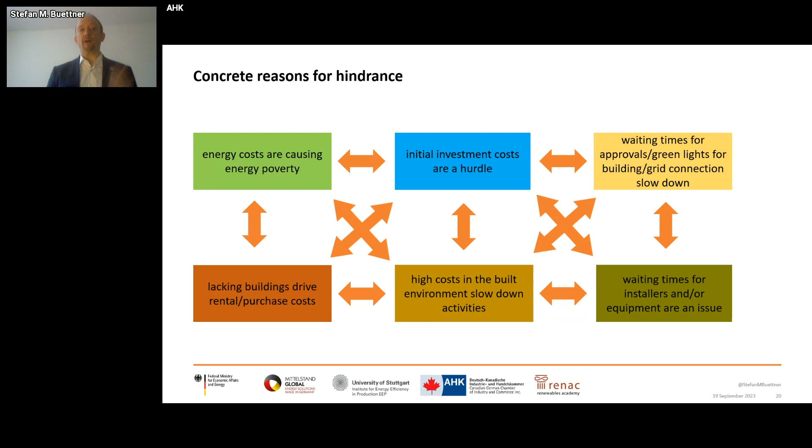However, next, the real potential of systemic efficiency is just waiting for us. And energy efficiency and systemic efficiency, it's not difficult. It's just a wee bit complicated, to use slang. Next. Increasing these resiliency approaches with systemic efficiency requires explaining a little bit what systemic efficiency is. Next.

In essence, we can optimize individual parts of the system, such as the windows, the walls, the insulation, ventilation system, etc., with the most efficient equipment. However, it may not be effective. The effectiveness, the systemic effectiveness, is combining the overall system. So for instance, I would like a certain brightness level in a particular room, and what forms of energy do I have available to get there? What are the individual steps from, i.e. solar power, wind power, whatever I have within reach, to fulfilling the desire of certain brightness?

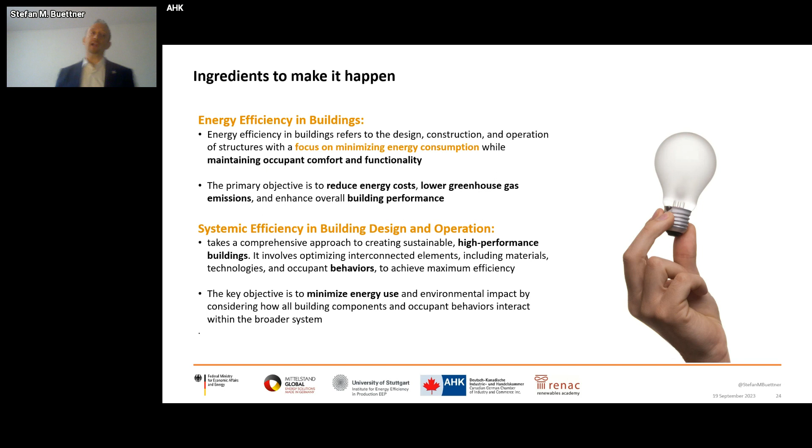Same with temperature. So when you see, we have the wiring, we have the lamps, we have the bulbs. There are many little steps. And the overall combination of ingredients, taking into consideration what I have on site and what I want, helps us in gaining systemic efficiency. Next, please.

In order to get there, we need some information. What you see here is the equipment of German dwellings with different energy sources. So about half of the households use gas as primary source of heating, and there's about a third each that use electricity and wood pellets, and the other renewable forms of heating are just catching up.

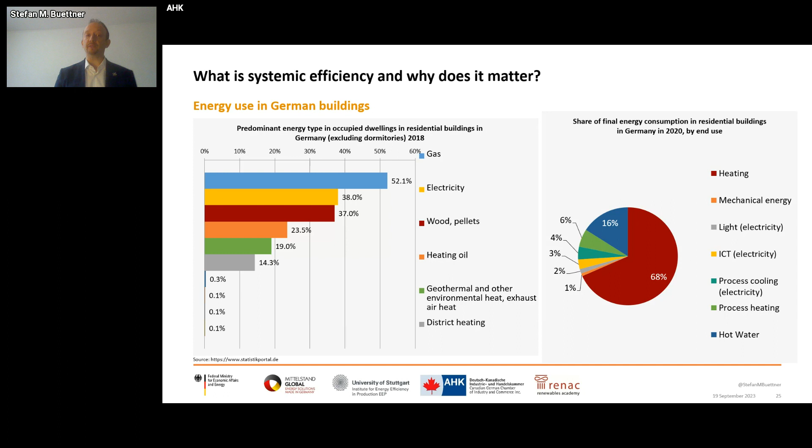What we see on the right-hand side, and that is, I believe, something very important, is that heating makes up 2/3 of the energy consumption in residential buildings. So take note, commercial buildings are slightly different here. The share and proportion of ICT, information and communication technologies, is increasing, whereas other aspects, because of energy efficiency, for light, might be decreasing. Next slide, please.

What we see here is what this translates into. We have heard from Peter about the various different realities that we already face with the buildings in our economies, both in Canada as well as in Germany. And therefore, you see on the left-hand side the distribution of all the dwellings in Germany per energy efficiency category. So the A category is the best and H is the worst. So we see that a large bulk of buildings is still in the medium to bad category, and there's only a small proportion that is already in the A category.

And since the buildings that exist would not unnecessarily be torn down, we need to find ways to improve the existing, perhaps even more than making sure that the newest ones are top-notch. On average, we need to increase the average. There's, however, lots to be done in the D to H categories. We go into that a little bit later, and of course, we should ensure that everything that is put up new needs to be done properly. Next one, please.

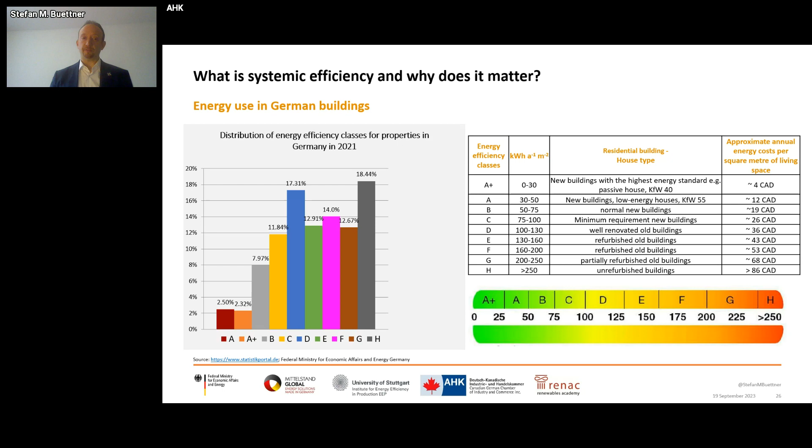For a couple of years already, there's the obligation across all the European Union to have energy performance certificates. They look a little bit different country per country, but typically disclose, and that is also a legal requirement whenever one wants to rent out a place or sell a place. This certificate has to be on display. Also on publicly open buildings, this has to be displayed, otherwise there will be fines.

However, over the past couple of years, the tendency was to go straight and very deep into the energy performance, and that was the only factor the rating went against. Now, in consideration of climate change and all that, that is now changing. Next, please.

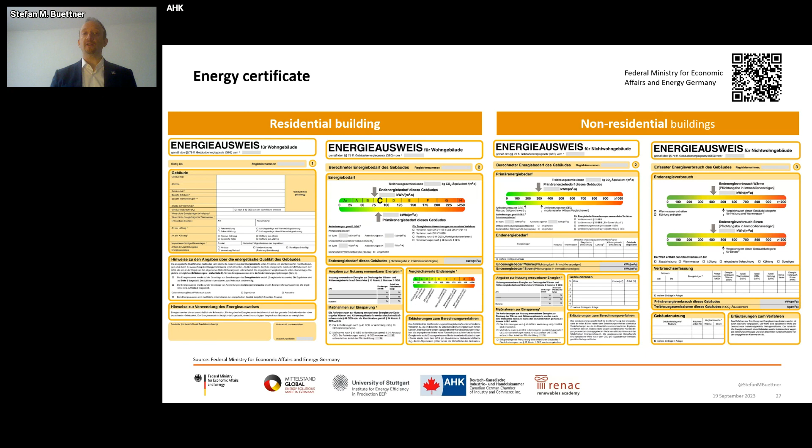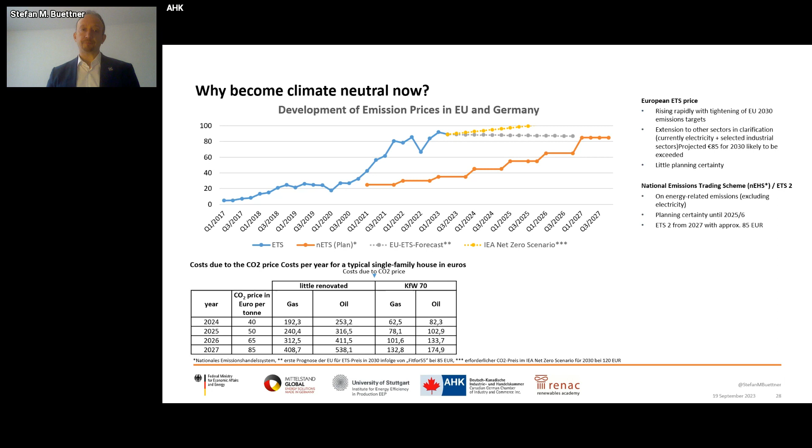The European Union, as well as the German government, is driving much more towards the sustainability footprint of materials used, not only in the built environment, but first and foremost, since this is our topic now, in the built environment here. That is associated with the Sustainable Product Initiative. And there's the attempt to build the national funding programs more on the overall environmental footprint, so the emission efficiency rather than just the energy efficiency. And that should lead to a so-called building resource passport. There's a QR code where you can find more of an attempt on how this could look like.

This topic is crucially important because of the crisis that we are confronted with. Where do I get materials from, particularly the critical materials that I need? How can I make better use of the materials that are in the system? How can I increase the recyclability? How do I know where the materials are from? That is also very much linked with the supply chain directive, where I need to be able as a manufacturer to disclose that the materials were harvested under acceptable conditions. So there are many things factoring in here, and more products will be confronted with the request to disclose the embedded emissions. Next.

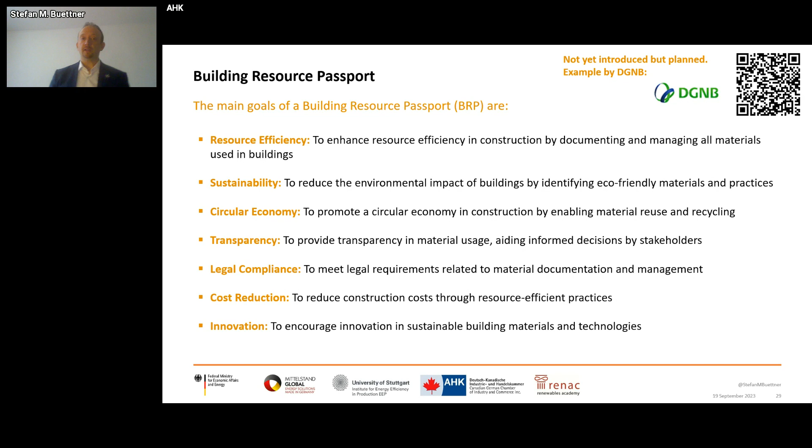In the attempt to support this, there are many activities, and this is one of them globally, to help develop the decarbonization of the built environment in general. So that's the building materials that are to be decarbonized in order to facilitate that. Because if I build a building, I use what's available on the shelves. But how do we make sure that what ends up on the shelves will gradually be better in their lifetime energy performance and emission footprint? So we need to put the impulse to act at the very beginning of the chain, so that we enable the built environment to be able to draw from the best performing products.

Next slide, please. So what could those dimensions be? There are three primary dimensions. Two of them are most important in our context today, which is what means are there to reduce the energy demand? Because when I reduce the energy demand, whatever source of fuel I use, I reduce my costs, I reduce the emissions.

So being smart about it matters, and therefore we need to be clever also in allocating the mixture of materials and technologies that we use. We can substitute to reduce the footprint, substitute the fuels, which depend largely on what I have around me, but we'll get to that later.

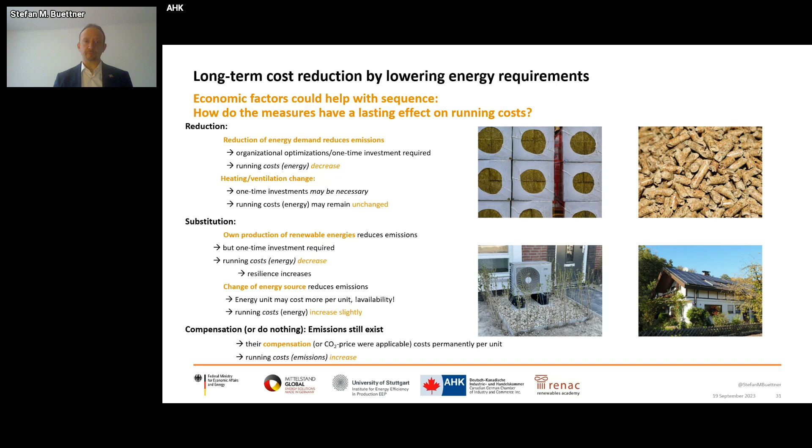And if I am, for example, in the office context and my business wants to promise and pledge for net zero, then we may also need to look into compensation schemes if there are certain things that cannot be completely substituted with, say, renewables. Next one, please. Now let's dive into ingredients on how to make this happen. Next, and next again.

Here, planability is the largest desire, because in addressing the climate crisis, both the German and the EU legislative bodies have tightened the regime quite a bit, and rightly so. However, that puts large tension on all those that need to act on that basis. How shall I afford that? How shall I lift the multiple tens of thousands of euros investment for that? And there, clear communication and planability is of the utmost importance, as we have learned the very hard way this summer.

So in essence, and that was the finding, wherever the local authorities plan to implement district heating and cooling, there's not going to be a requirement to put in something like heat pumps. Whereas wherever the local authority doesn't plan to put district heating and cooling in place, there is going to be an obligation to take heat pumps or equivalent action.

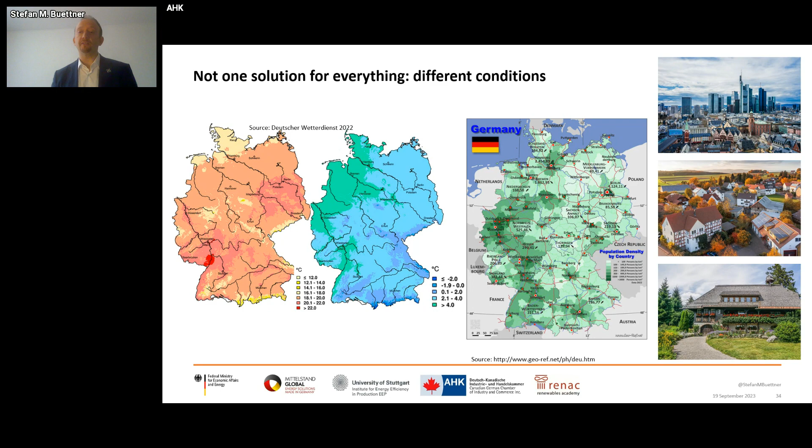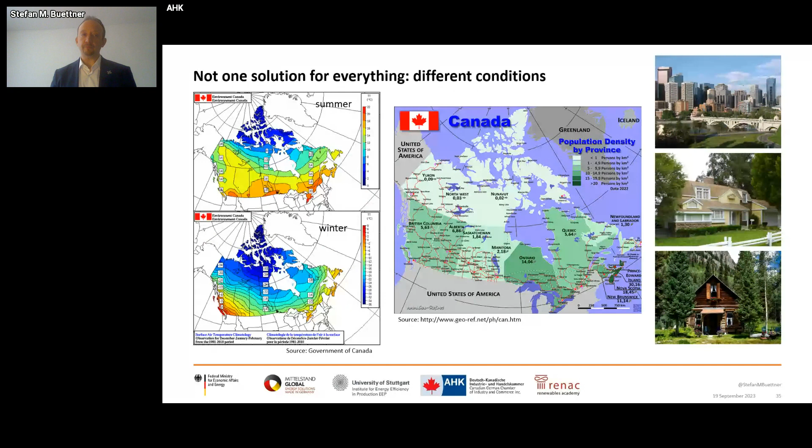If we click next, we see that, and you know that better than I do, the temperature delta is much, much more severe in Canada, and your rural is much more rural than our rural, but the principle applies the same way. Next, please. So in order to get there, we have many different technologies that can help us on this way. Next, and next again.

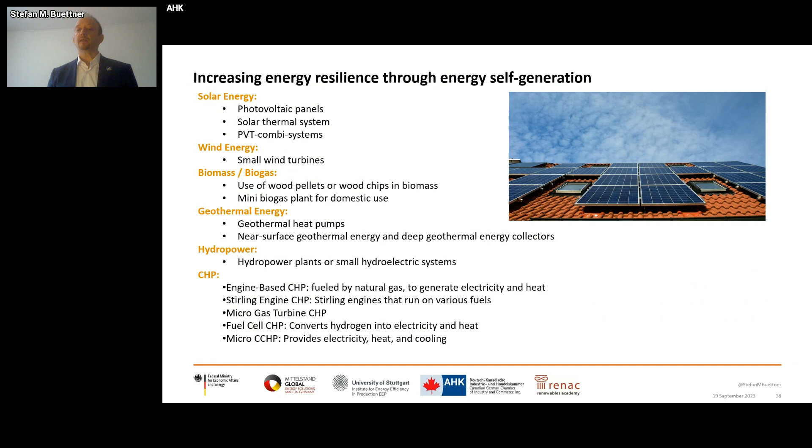Some of these are creating resilience through self-generation. So what can I do to create my own energy, particularly in the remote areas where I may not have easy access to large-scale renewable or clean energy generation? I'm not going to go into detail here. Next, please. What these renewables have in common, however, is that most of them aren't available 24/7 in the same intensity. That has been a cause for argument in the past. However, there are solutions. Next, please.

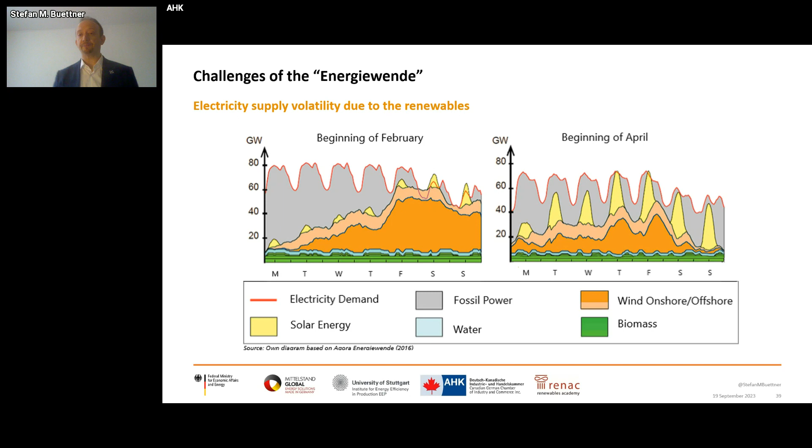The solutions against that are called energy demand side flexibility, meaning adjusting my own demand of energy to the available amounts of energy. So either take energy earlier or later than usual, or increase or decrease the energy per time. So for example, putting in the vacuum cleaner, the stove, and the kettle at the same time, or just one after another.

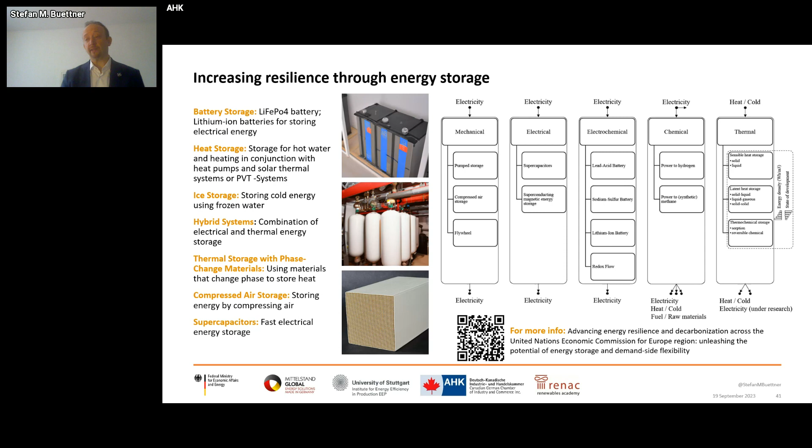Next, please. What is important to consider, though, is that with storage, particularly electric generation and battery storage, the way the energy is being transmitted is crucial. Because most types of on-site electric renewable generation generate electricity in direct current, and batteries also store energy in direct current. So ideally, we can use the power line, the generation, and the storage, and directly feed the energy from one to another, and that way we can save up to 10% of the energy.

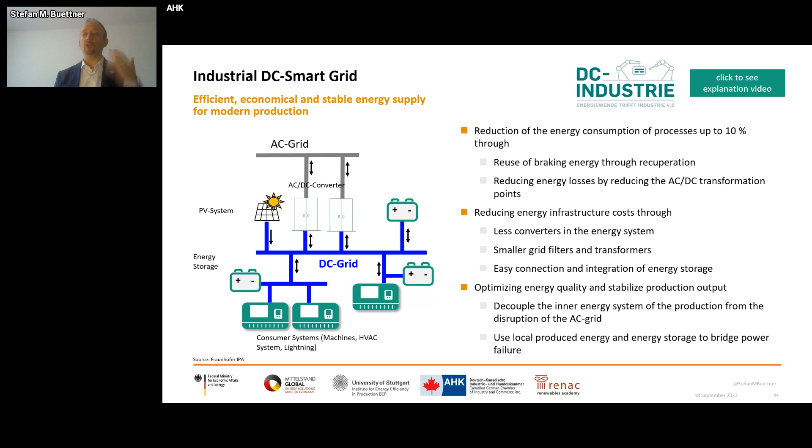Now a series of single clicks, please. We can do a lot about building materials. Next.

There's lots and lots of technologies in the heating and cooling section. However, there we need to phase out gradually the gas and the old stoves and see how we can make better use of waste heat and other technologies that serve the desire, i.e. getting warm to feel comfy, with what's most sensible in that context. It could even be an infrared heating if I have surplus renewable electricity.

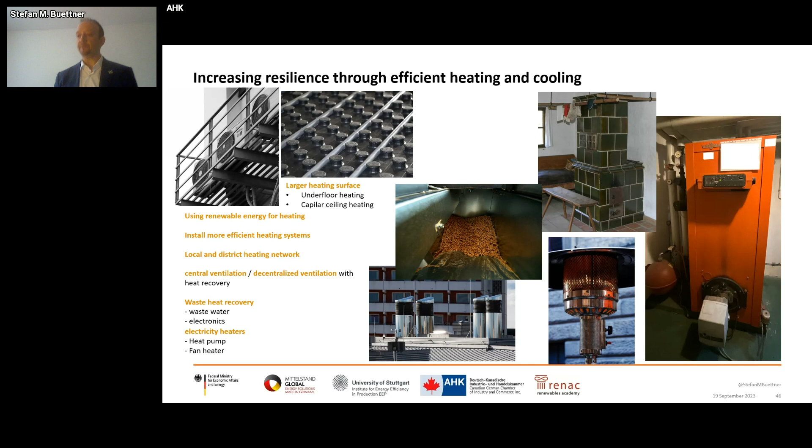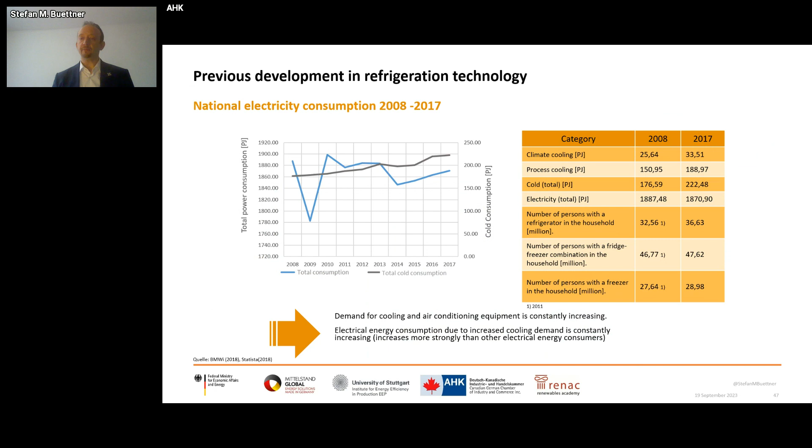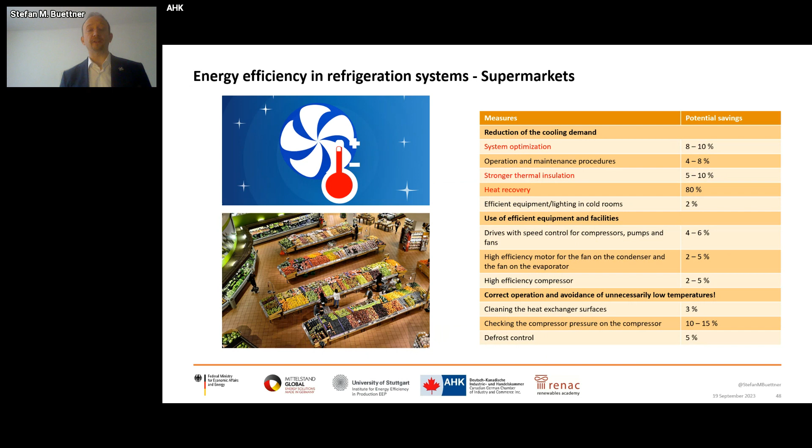Next one, please. As said, refrigeration and cooling in the extremely hot summers becomes more and more important. And that's the one form of energy that is gradually increasing in the demand. Next. Particularly in the context of offices and supermarkets, etc., where the cooling requirements are existing, there are so many techniques on how to save on energy consumption, particularly through heat recovery. And there are very nifty ways as an energy or building user to apply those. Next.

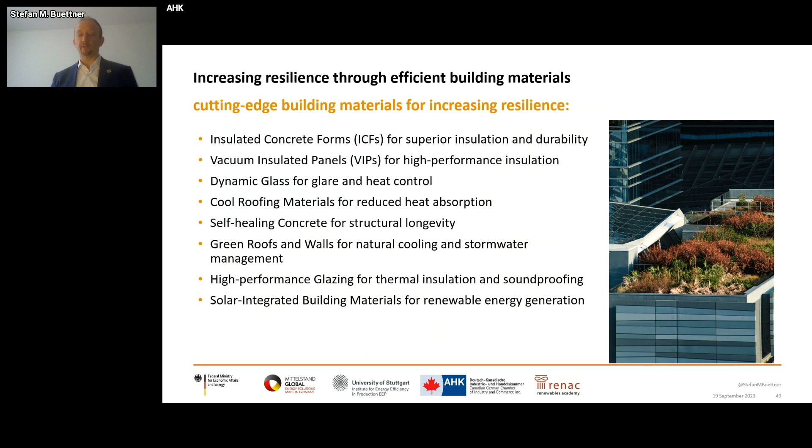Innovative building materials is something that we'll hear a bit more about later. So therefore, next again. The challenge or the opportunity we have is to systematically put things together. So avoidance, reduction, implementing renewables, making use of passive ventilation and active heat recovery. Next. Next again, please. Good.

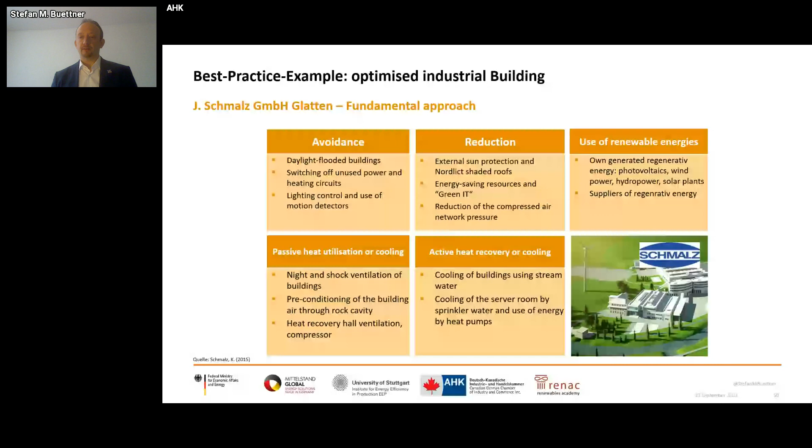Digital means can help us a lot. And on the previous slide, when you get it, you can look at that closer. You find many, many digital solutions on how to help that, and there's also a company to come. However, in order to find a solution, I need to be able to chart my path effectively, and for that, I need to know where I am. Next.

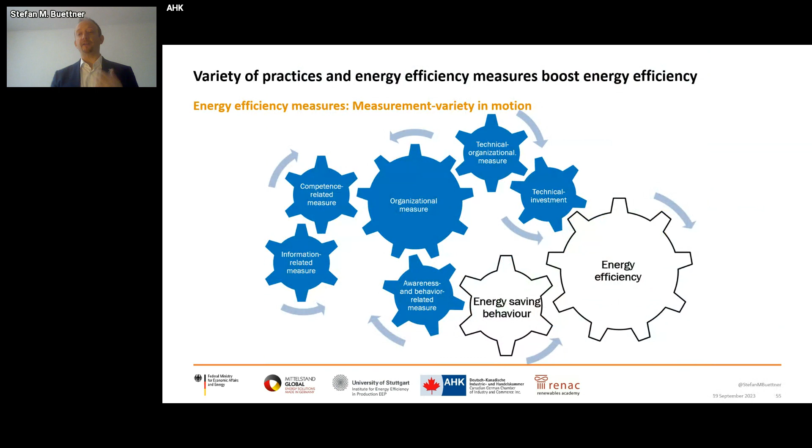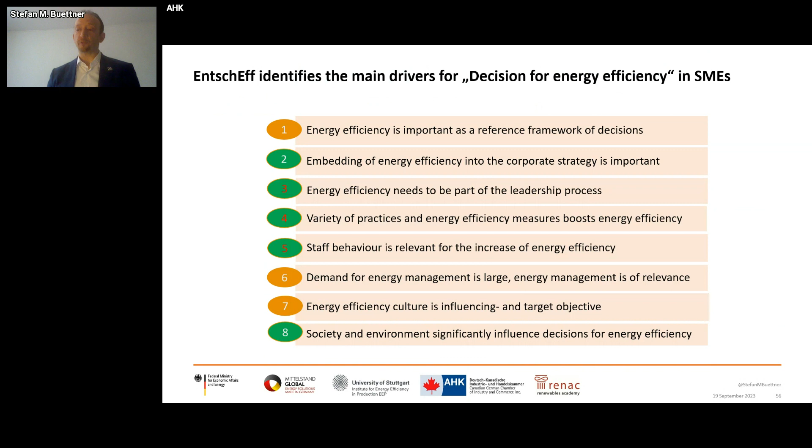The critical aspect here is to trigger, however, the decision, if you're not yourself the decision maker. And for that, next, we need to not only invest into tech, we need to have a range of measures that emphasize each other's impact. Next. And because of that, collectively help to drive energy efficiency. Now, four clicks now. You can look at the examples in your own time. Thank you. And one more. And one more.

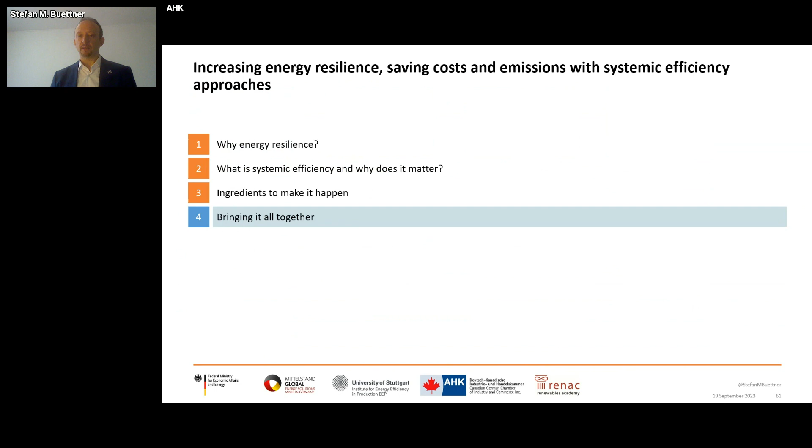So finding the ideal mix is actually the real crucial bit. Next. Because it combines not only technologies, next, but the human factor. The human factor means I need the technology, next. I also need the business model, but I particularly need the humans. Tear down the walls of the unknown unknowns. Technology versus taking the decision. The decision is the important thing. Otherwise, technologies don't help me.

Getting the buy-in of the stakeholders is so powerful and stronger than just mandating them to do something. Looking for energy waste, like unnecessary consumption. Next. And awareness is much more powerful also as perception, because if I give examples on what could be done, the human brain does something really cool, and that is allowing us to adapt the knowledge from one area to another. And the intrinsic motivation of the stakeholder works much stronger than an ordered one. And therefore, it's important to understand where are the pains, what serves most.

And removing the barriers itself, as we know also from our New Year promises to ourselves, removing the barriers doesn't make us go to the gym more often. We actually have to do it. Yeah, so we need to nudge it. So in conclusion, we need to go beyond removing the barriers. We need to provide the missing knowledge and empower people and stakeholders to solve the issues. We need to remove fears, encourage people to take a decision, and accompany them in the journey ahead.

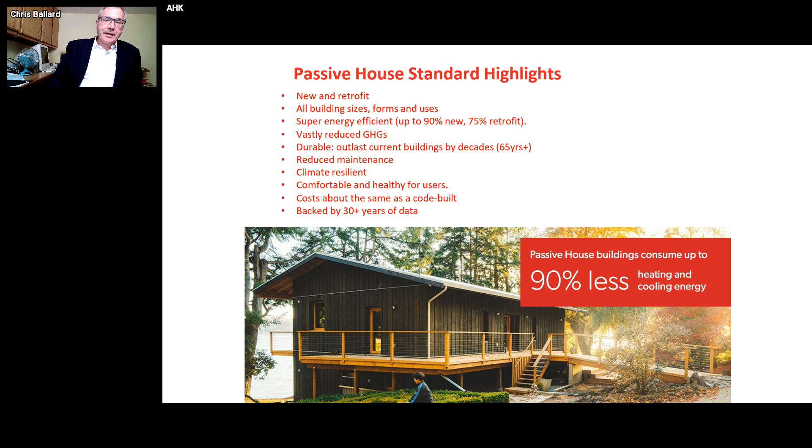And so funding from the federal government and the provincial governments looked at a number of ways of addressing this energy crisis. The one they settled on after testing a variety was really good insulation, good components, air tightness. In other words, a lot of the things that have been adopted in the Passive House methodology. A number of other countries were also looking at the same thing. So it's really kind of neat to see this Canadian project reflected in a lot of the Passive House standards. So next slide.

So you've probably no doubt heard about the wildfire situation in Canada. It's been a complete and utter disaster. We've lost 16.5 million hectares to wildfires this year so far. We still have a couple more months of wildfire season left. Normally, it's closer to 2.5 million hectares. 16.5 is a lot. More importantly, it accounts for 15.7 thousand premature deaths in Canada per year, primarily due to particulate matter that comes from wildfires. It also comes from burning diesel fuel and burning coal.

So, I mean, we can measure the deaths because of climate change, and it's only getting worse. We've had 2 heat dome events in recent years that resulted directly in 700 deaths, probably double or triple that if we really wanted to peel back the onion. And we know that climate change is a $25 billion annual hit to the Canadian economy by 2025. So all of this is to say that Canadian government and business are motivated to address climate change. Next slide.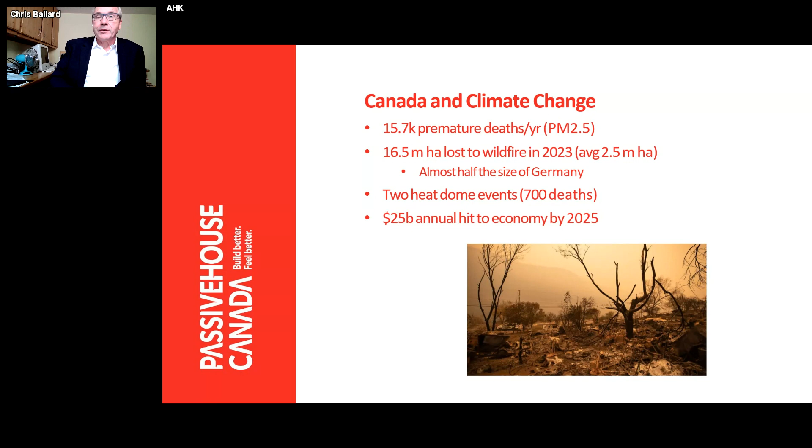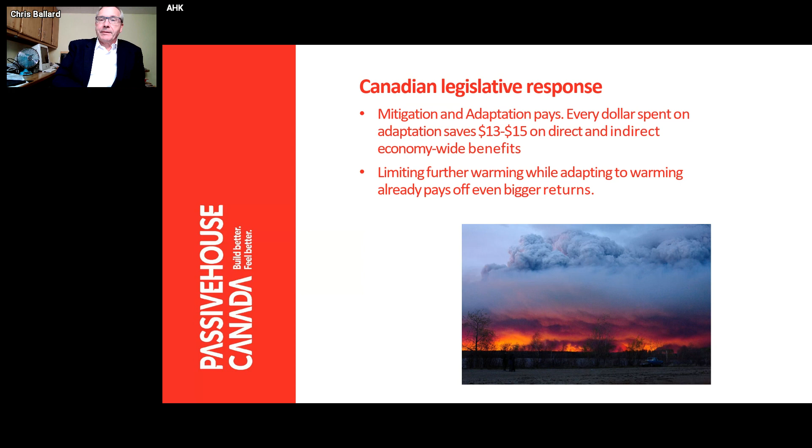So what is the response? Well, governments of all levels agree that mitigation and adaptation pays. We know in Canada that every dollar we invest in adaptation saves us $13 to $15 in direct or indirect economy-wide benefits. We know that limiting further warming gives us even bigger returns. Next slide.

A bit of a Canadian legislative response. Canada obviously is a signatory to the Paris Agreement, but within Canada, all of the provinces and territories, together with the federal government, signed an agreement called the Pan-Canadian Framework on Clean Growth and Climate Change, and that does 3 really key things. It sets emission reduction targets. It looks to grow the economy, and it looks to build resilience to a changing climate.

I will say that at the same time the provincial and federal governments were working on this, we've had 400 plus Canadian municipalities declare a climate emergency, and they are all looking for ways of reducing their carbon footprint within their communities. Namely, primarily because in Canada, a lot of our GHG emissions come from buildings. A lot of these municipalities are looking at how they can improve their own building standards to help reduce GHG emissions. Next slide.

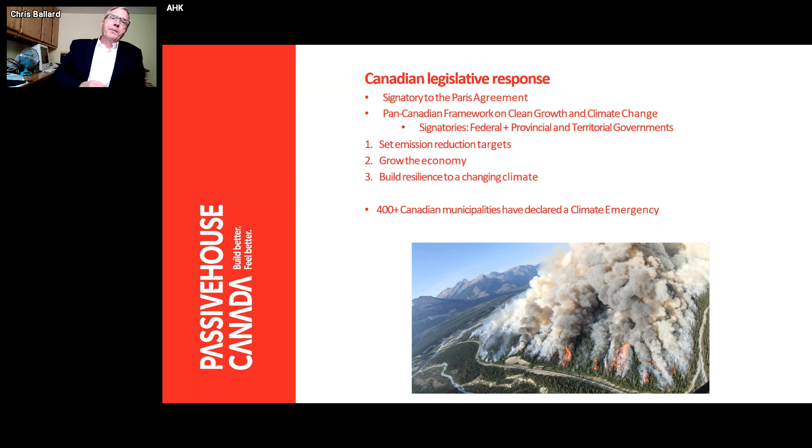So we have the Pan-Canadian Framework on Clean Growth and Climate Change. Again, 3 things: driving innovation and growth by increasing technology development and adoption, ensuring Canadian businesses are competitive in the global and low carbon economy, and advancing climate change adaptation.

So more than multi-unit residential buildings or single-family residences, Passive House Canada and our members are increasingly recognized around the world. If you have to densify or wish to densify your cities, and you at the same time need to reduce GHG emissions and create healthy places for people to live and work and play, the Passive House standard is the way to go. Check out the Curve website, some stunning pictures. Next slide.

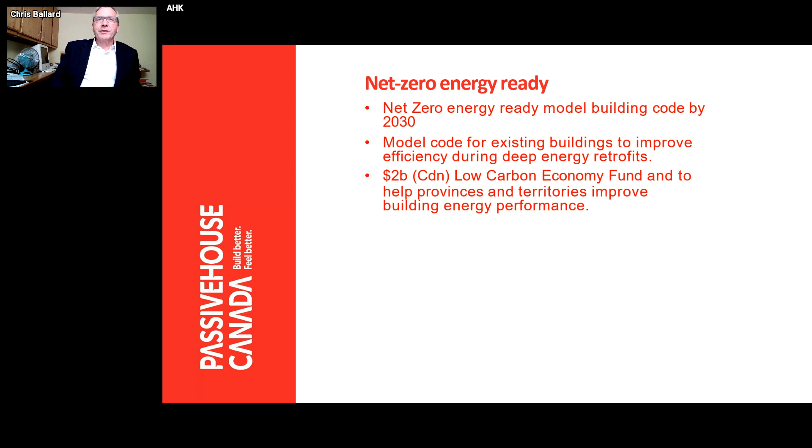On top of the other funds, there's a $2 billion low carbon economy fund to help provinces and territories improve building energy performance. There's all sorts of other money that the federal, provincial, even municipal governments are putting in place. But these were just some of the top line items. Next slide.

So we talk about the federal government and its work with provincial governments. We heard earlier about BC. I've said British Columbia is sort of the ancestral home of Passive House Canada. It's where our head office is, in Victoria, BC. But BC really has led the way across Canada in adopting an energy step code for buildings.

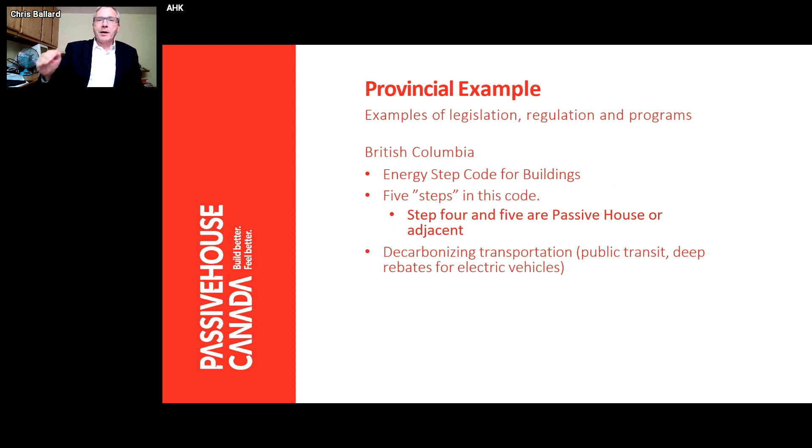I'm happy to say that there are 5 steps in the code, and step 4 and 5 are really Passive House or Passive House adjacent. So BC recognizes the importance of the Passive House metrics. BC is also working very hard to decarbonize transportation through public transit and really deep rebates for electric vehicles. But when it comes to buildings, that step 4, step 5 are driving innovation all across the province. Next slide.

Passive House is a pathway to new building compliance. There's increased treated floor area allowed as bonusing if you're building to the Passive House standard. So it's a carrot and stick. The stick is increased regulation that drives down carbon emissions, GHG emissions. The carrot is if you do it, there can be some nice things for you, such as an increase in treated floor area.

I mentioned about transit. And I mentioned one of the other big areas in BC is incentivizing the move from fossil fuel for heating and cooking. So a move away from the use of methane gas for cooking to electric, and specifically electric induction, and the move from using fossil fuels for heating to electrified air source heat pumps, geothermal, that sort of thing to make your buildings work.

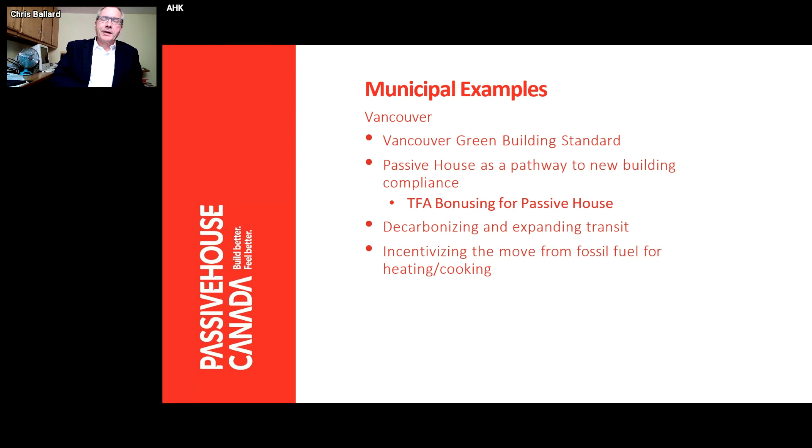I should make a comment too. One of the key differences between Europe and Canada, quite frankly, and why I think North America has been slow to adopt high efficiency, low energy buildings, is frankly the price of energy. And I'll speak for Canada. The price of energy in Canada is ridiculously low. The federal government has implemented a price on carbon so that people or businesses who pollute pay more. That carbon pricing revenue goes to fund a lot of these programs I was talking about, but it also goes back to lower income Canadians to offset their costs of paying a little bit more for energy.

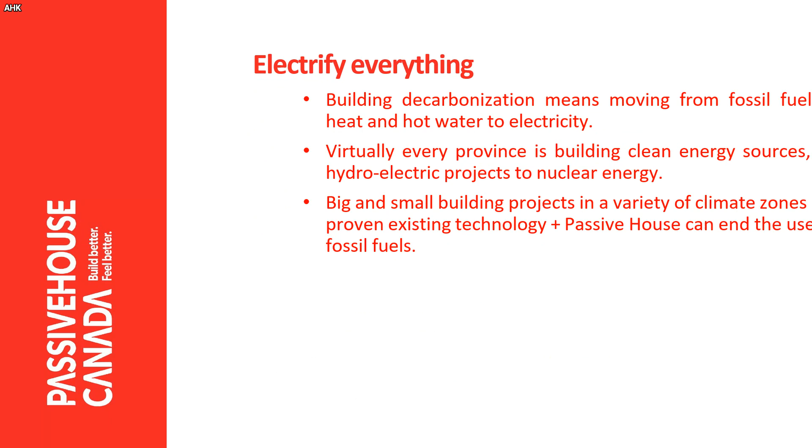Canada is very much heading down that road to electrifying everything, whether it be buildings or transportation. And that's critically important to get us off our addiction to fossil fuels. Next slide.

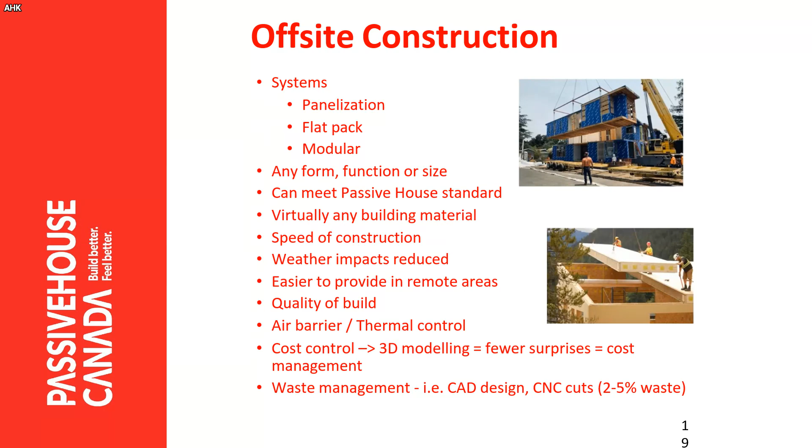I won't spend any time on the Passive House standard. You can have access to the deck and check it out yourself later on. Next.

Very quickly, in conclusion, I would say that Canada is an extremely desirable country to invest in. A lot of European companies find us a good stepping stone to the American market. There is a massive uptake in high performance buildings coming, like Passive House or Passive House adjacent. Governments have set very strict legislative targets. They're providing billions to encourage innovation and investment.

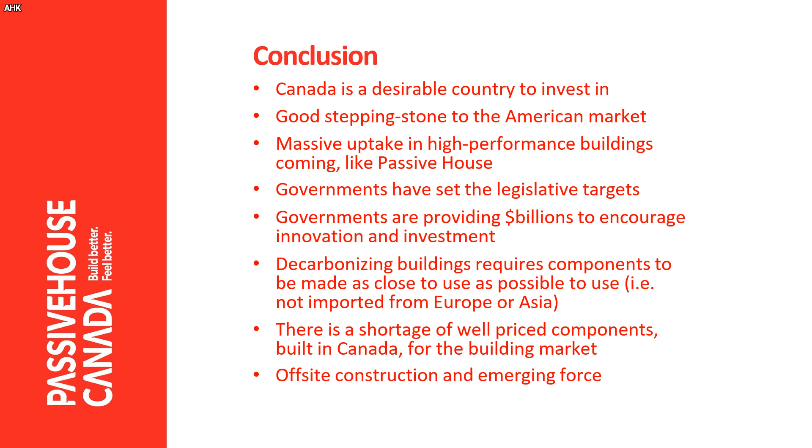And decarbonizing of buildings requires components to be made as close as possible to use. So where we've imported all sorts of components from Asia, from Europe, we'll be doing less and less of that as we start looking at embodied carbon. And transportation plays a big role in that. And there's a shortage of well-priced components built in Canada for the building market.

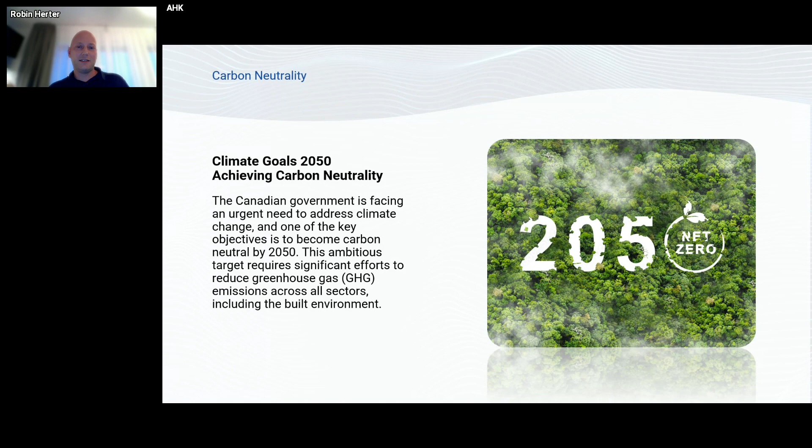The Canadian government is facing an urgent need to address climate change, and one of the key objectives is to become carbon neutral by 2050, as in the EU. This ambitious target requires significant efforts to reduce greenhouse gas emissions across all sectors. Next, please. And one of the important sectors is the building sector. Today, residential, commercial, and institutional buildings contribute 17% of Canada's greenhouse gas emissions. Considering building materials and construction brings that number closer to 30%, making the building sector Canada's third highest carbon emitter.

So what that means, and what you can see, for example in BC, is that it is a big topic, and the plan is zero emission buildings for all new construction by 2030. And so for this, we need to look at energy efficient houses and how they can get more efficient. Please go to the next slide.

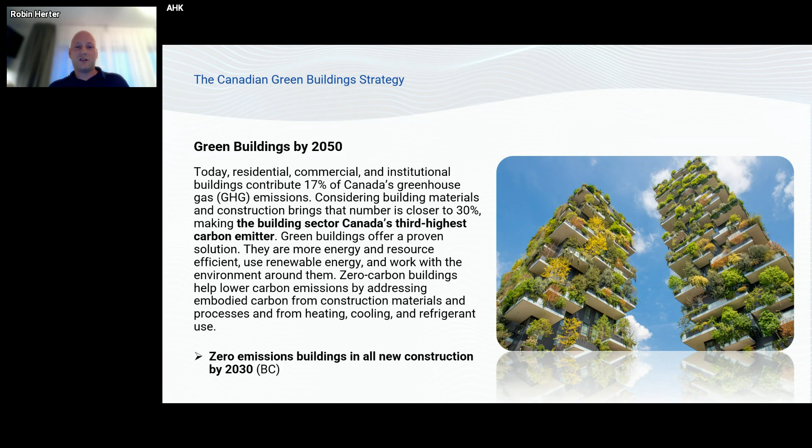So what we can see with energy efficient houses, as Chris was talking about with the Canadian Passive House, is that we need to optimize the building's envelope. What we need is super insulation and air tightness. The tightness and super insulation keep the warmth inside and the cold outside. But the problem is it keeps the mold inside as well. There's no air circulation.

So this is crucial, that we have efficient heat recovery ventilation systems for these houses that are coming. And the biggest topic on this is that we need to reduce avoidable ventilation heat losses. That's absolutely crucial.

Please, this is not the next slide. Okay, I would skip here.

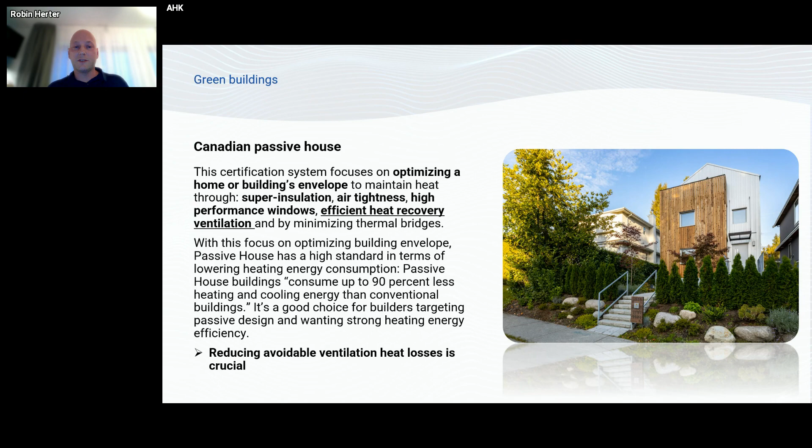I would make a little journey to Europe right now, because I spoke about the energy efficiency of ventilation systems. But the big topic right now in Germany is the Energy Performance of Buildings Directive. It says that by the year 2045, all fossil fuel-based heating systems must be replaced with sustainable alternatives. So this means that right now, all focus in Europe, especially in Germany, is on heat pumps. Please come to the next slide.

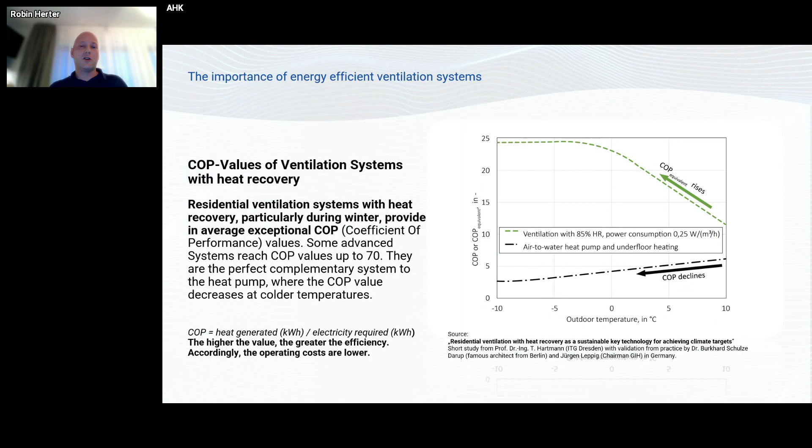But the biggest problem with heat pumps is, they're quite energy efficient, but if the temperature decreases, they get less and less energy efficient. But with the residential ventilation system, as you can see on this slide, when it's getting colder and colder, the energy efficiency rises. So this is a perfect complementary system to the heat pumps. Not only complementary, it's a perfect energy efficient system by itself. Please go to the next slide to see what the study says.

We use these COP values here to compare heat pumps with a residential ventilation system. So what we can see, the best residential ventilation systems with high heat recovery can reach COP values up to 70. This means that for every unit of electricity consumed, they provide 70 units of heating or cooling output, significantly reducing energy consumption and cost.

This is absolutely crucial, especially for Canada. For the cold seasons, you need a system that is energy efficient when it's getting colder. And there are the problems with other systems like heat pumps, as I spoke about. That is why I focus right now on the residential ventilation system.

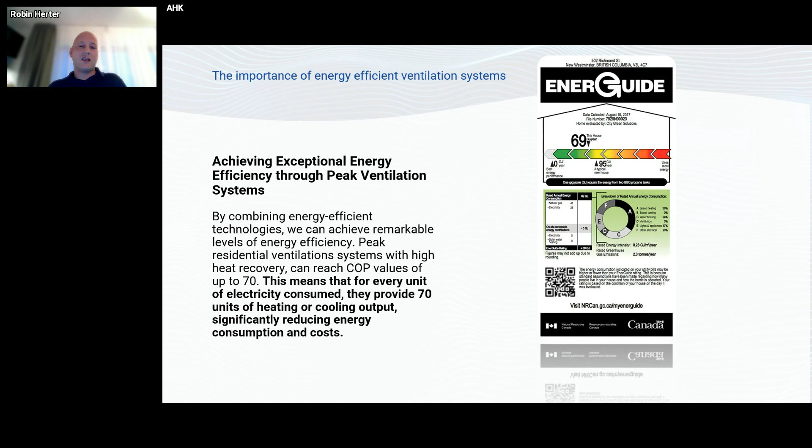What you can see here, what I found on the internet, is the EnerGuide. There you can see which part is important, and this is the space heat. So we really need to focus on the space heat. We need to reduce the heat loss in every house. Please, to the next slide.

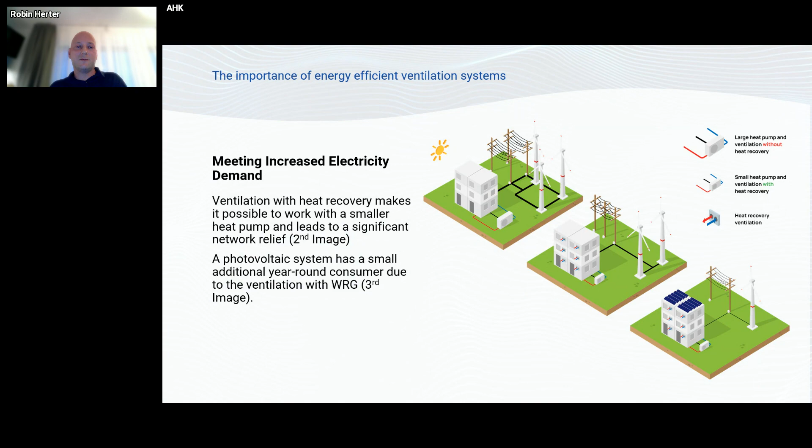This is from the study as well. The picture shown here is about when we use both systems, residential ventilation and heat pump, together. We need renewable energy, absolutely, but we can reduce the demand for renewable energy. If you use very energy efficient systems like heat pumps and residential ventilation systems with heat recovery, we can reduce that demand. Please, to the next slide.

What this study shows as well, for comparison, is when you have an energy efficient house with super insulated walls and windows, and no energy efficient ventilation system inside. You can see that an energy efficient ventilation system with heat recovery above 85% can save up to 69% of energy consumption and GHG emissions.

That doesn't mean we need to close the windows or we don't need windows anymore, but it means if you close the windows in the winter time, you can save a lot of energy consumption, up to 69%. That is a lot. Please, to the next slide.

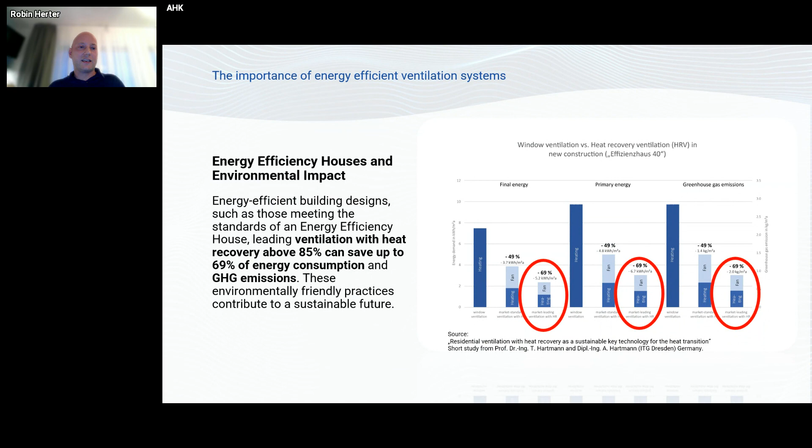For residential ventilation systems, not only the energy consumption is important, they have additional benefits. One is a health benefit: proper ventilation ensures fresh air circulation, reducing the risk of indoor pollutants. Another is building preservation: energy efficient systems help maintain stable temperature and humidity levels, preventing moisture related issues that can damage building structures over time.

And for the installation part and the cost of these systems, these compact residential ventilation systems with heat recovery are really easy to install. Please, to the next slide.

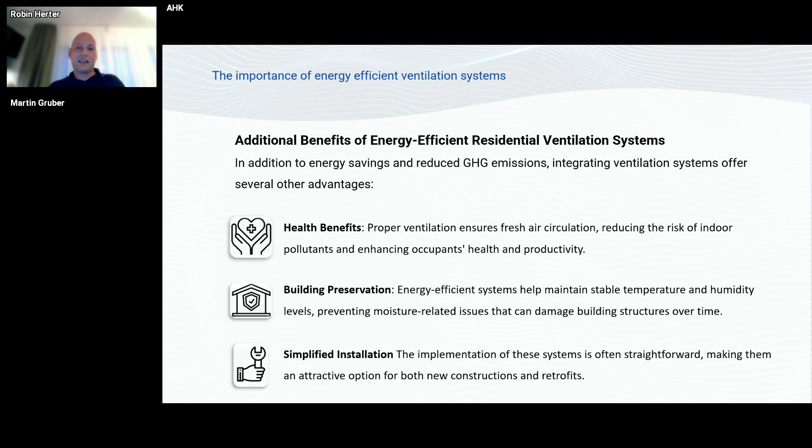Okay, yeah, absolutely. I'm finished in the next 2 slides.

So this is the system, where we can see all the components. Indoors, you can see the cover where the air goes inside. The fan sucks air from outside, it goes through the ceramic heat exchanger, which saves the energy, the warmth inside, by up to 90%.

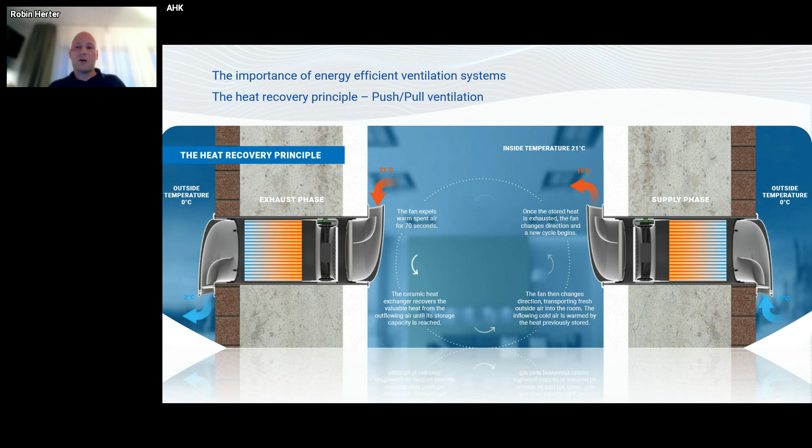So that means at 0 degrees, the air that comes back into the room after the fan is heated up by 90%. So 21 degrees goes outside, 90% comes back inside. So you only need to heat up just 3 degrees, and you do not need a lot of energy. So this is one big topic here. Please, to the next slide.

Yeah, and this is a project that we have right now in Bavaria. This is a timber wood framed energy house here. You can see how it's installed. It's super easy. You have there a mounting block that you put inside the frame, and just put the tube inside. Just put the components of this ventilation system inside.

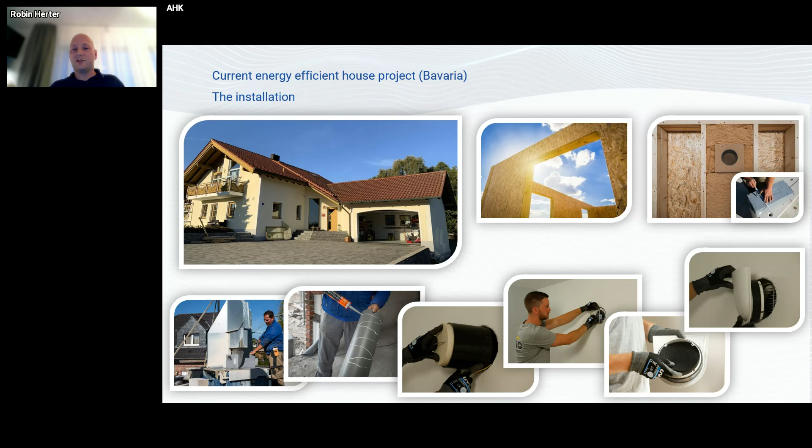There's a ceramic heat exchanger. We have the fan, and that's all. And then you need a cable to that, and that's all. So it's really easy, it's really compact, and the installation is not that expensive. So it's a good system to save a lot of energy.

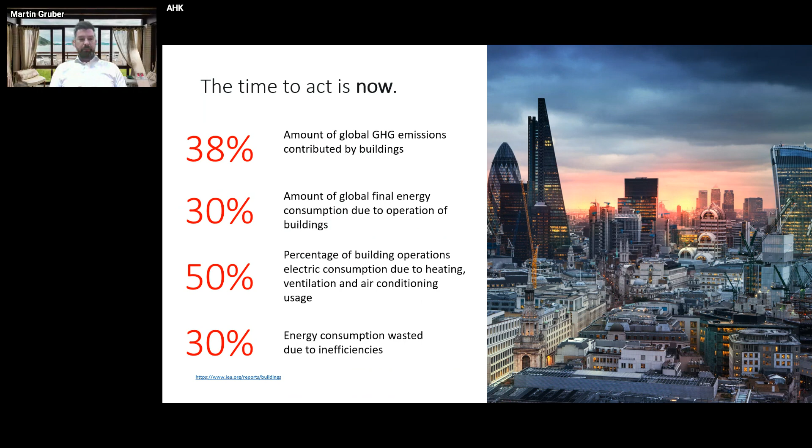So I think the overall objective is that commercial buildings around the world are waiting to be revolutionized, and we need to break the negative energy consumption patterns that exist today. So this shows the type of buildings we are focusing on. We clearly focus on commercial buildings: shopping centers, multi-site retail, office towers, but also schools and universities are the key targets for our technology, where we want to have an impact. Next slide, please.